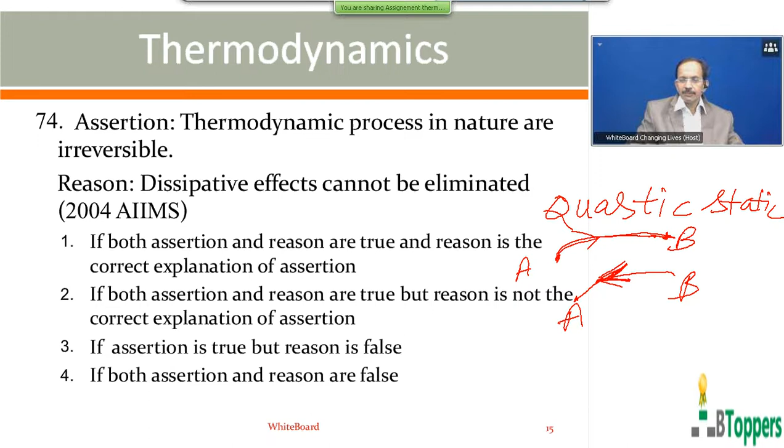Look at the next question, 75. It is also based on the same reasoning, again given in All India Institute of Medical Entrance, All India Institute of Medical Science exam 2005.

Assertion: Reversible systems are difficult to find in the real world. Reason: Most processes are dissipative in nature.

It is difficult to find a true reversible system in nature because there exists some friction and/or air resistance or other dissipative forces acting on the system in every process in nature. So here also the first option is the answer.

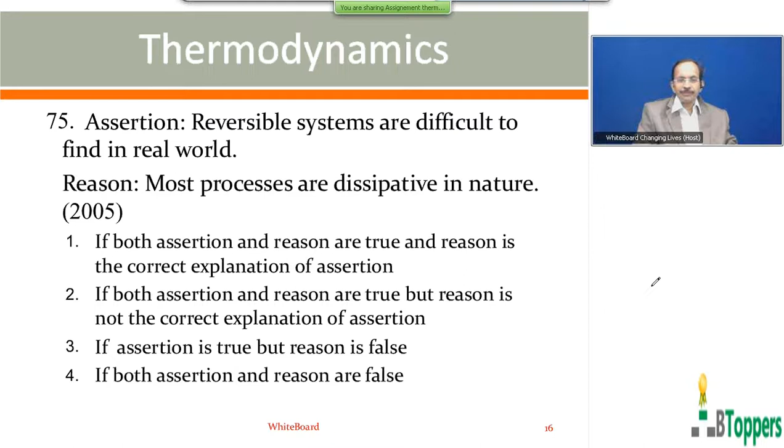Next, look at question number 76. This question was also given in one of the All India Institute of Medical Sciences exams in a previous exam paper. Assertion-reason, look at question number 76.

Assertion: The Carnot cycle is useful in understanding the performance of heat engines. Reason: The Carnot cycle provides a way of determining the maximum possible efficiency achievable with reservoirs of given temperatures. From Carnot's theorem, as I discussed about the statement of Carnot's theorem.

From Carnot's theorem, we can say that the maximum possible efficiency of a heat engine working between two temperatures T1 and T2 is given by E equal to 1 minus T2 by T1, where T2 is less than T1. T1 is called the temperature of the source, hot body, and T2 is the temperature of the cold body, called the temperature of the sink.

So for any heat engine working between the same two temperatures, the efficiency cannot be greater than the efficiency of a Carnot heat engine.

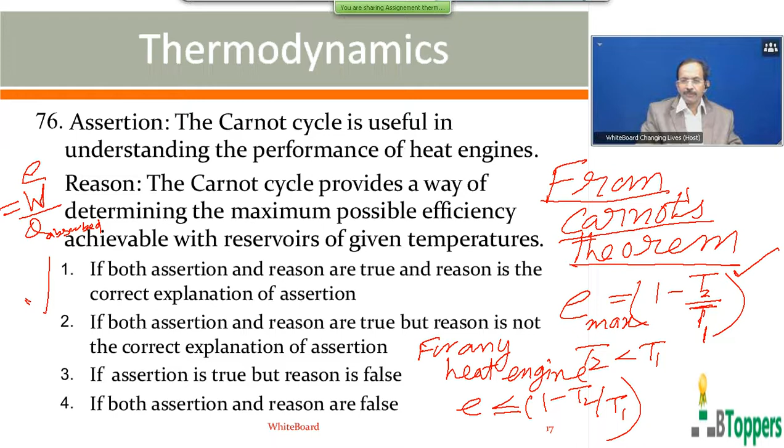So look at question number 77. This question was also given in one of the previous AIIMS exams, that is All India Institute of Medical Sciences entrance exam. Look at this question number 77.

Assertion: for an isothermal process in an ideal gas, the heat absorbed by the gas is entirely used in the work done by the gas. Reason: during a process taking place in a system, if the temperature remains constant, then the process is isothermal. As I discussed earlier, the theory part in isothermal process.

So for an ideal gas, in isothermal process, the temperature remains constant. The internal energy of a fixed mass of an ideal gas with a given atomicity is directly proportional to the absolute temperature of the gas. So if the temperature of the gas is constant, the internal energy of the gas will be constant, or we can say the change in the internal energy of the gas will be zero.

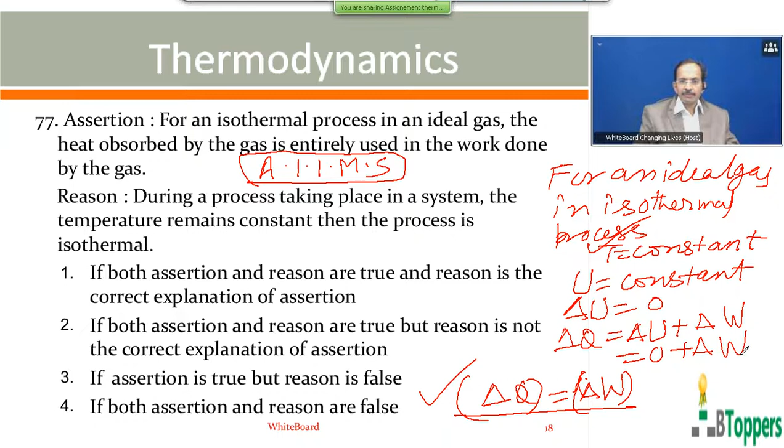So look at question number 78. Conversion of water to steam is accompanied by which process? There are 4 options on screen: adiabatic, isothermal, isochoric, cyclic.

You cannot call the conversion of water to steam an adiabatic process because heat energy is absorbed by the water. The heat energy absorbed, when water changes into steam, is equal to the mass of water converted into steam multiplied by the latent heat of steam, which is not equal to 0, which is greater than 0. Therefore, the process cannot be adiabatic.

And when water changes into steam, there will be a large increase in volume. During vaporization, there is a large increase in volume. So when water changes into steam or vapor, volume does not remain constant. Delta Q is not 0, and volume is not constant. Therefore, the process cannot be an isochoric process.

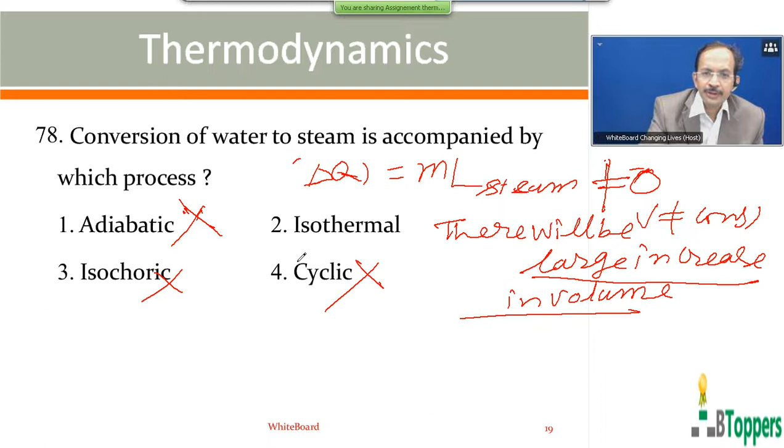So the conversion of water to steam takes place at a constant temperature equal to the boiling point of water. Suppose pure water is boiled in an open vessel at atmospheric pressure, then it boils at 100 degrees centigrade. Once water in an open vessel begins to boil at 100 degrees centigrade, the temperature of the boiling water remains constant at 100 degrees centigrade until the entire mass of water is completely converted into steam.

Therefore, temperature remains constant during the change of state. Therefore, the process can be called isothermal. So the second option will be the answer.

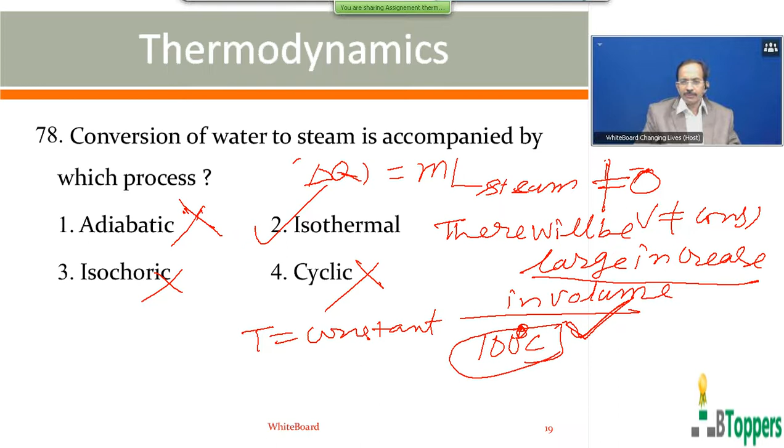Then next, look at question number 79. An ideal gas is taken through the cycle A to B, B to C, C to A, as shown in the figure. The net heat supplied to the gas in the cycle is 5 joules. The work done by the gas in the process A to B is - you can observe there are 4 options on the screen. So work done by the gas in a cyclic process is equal to total work done.

The net work done by the gas in a cyclic process is equal to the area below the PV graph and the volume axis - the total work done by the gas during the cycle. So in the process A to B, there is a decrease in the volume.

Volume decreases from 4 cubic meters to 2 cubic meters. So work is done on the gas in the process A to B because the volume at B is less than the volume at A. In the process B to C, volume is constant, so no work is done. In the process C to A, the volume of the gas is increasing.

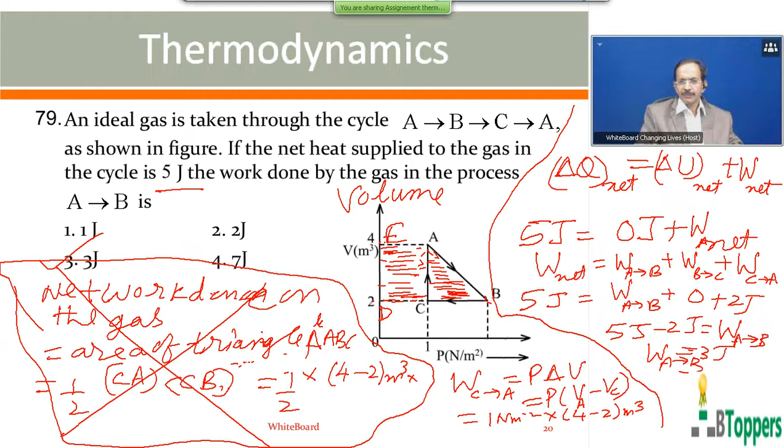Look at the next question, question number 80. A Carnot refrigerator extracts heat from water at 0 degree centigrade and rejects it to a room at 24.4 degree centigrade. The work required by the refrigerator for every 1 kg of water converted into ice is...

This problem is given on the Carnot refrigerator, which makes use of the Carnot cycle. So the lower temperature, the temperature of the body at lower temperature from where heat is extracted - the refrigerator extracts or removes heat from the colder place to the hotter place. Temperature of the colder place is 0 degree centigrade, or 273 plus 0 Kelvin. The temperature of the hotter place to which heat is pumped out is 24.4 degree centigrade, so 273 plus 24.4 Kelvin.

They are asked to calculate the work required to be done by the refrigerator to convert 1 kg of water into ice.

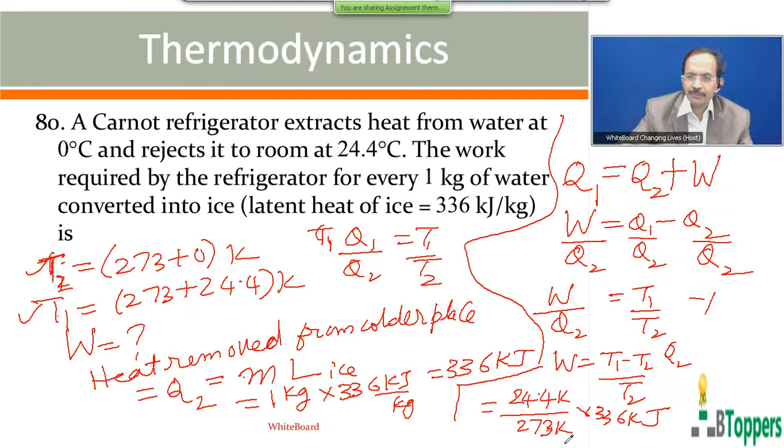So the closest answer for this is the first option. This was given in one of the previous EAMCET exam papers.

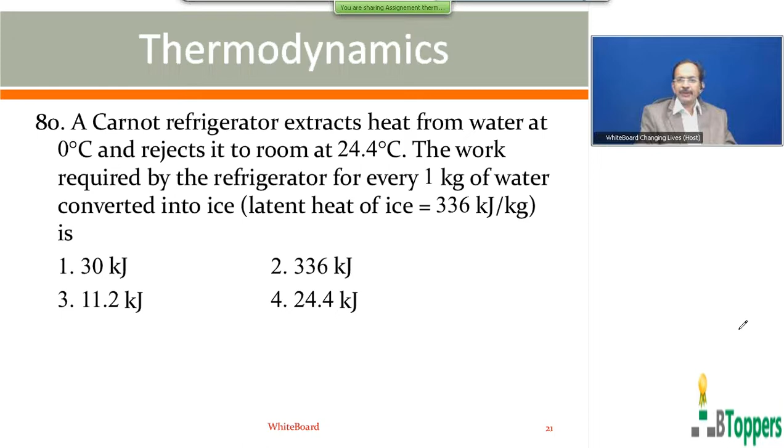So I am going to move to the next question. Look at question number 81.

A thermodynamic system is taken from initial state I with internal energy UI equal to 100 joules to the final state F along two different paths, IAF and IBF, as schematically shown in the figure. The work done by the system along the paths AF, IB and BF are WAF equal to 200 joules, WIB equal to 50 joules, and WBF equal to 100 joules, respectively. The heat supplied to the system along the paths IAF, IB and BF are QIAF, QIB and QBF, respectively. The internal energy of the system in state B is UB equal to 200 joules, and QIAF equal to 500 joules. The ratio QBF by QIB is...

So, of course, this problem was originally given in the 2014 IIT JEE exam. But the solution to the problem is within the scope of other entrance examinations also.

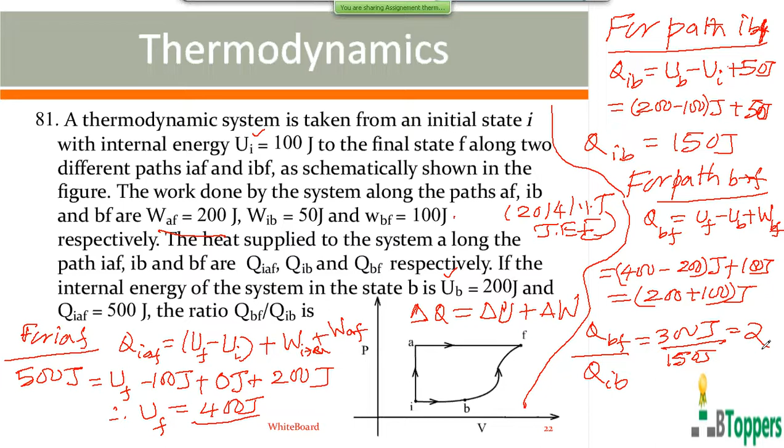Those who want to copy the working can take a pause and copy it. So if you divide QBF by QIB, QBF you get 300 joules, QIB has 150 joules, so the ratio will be 2. So the answer will be 2. Those who want to copy the working, please take a pause and copy it.

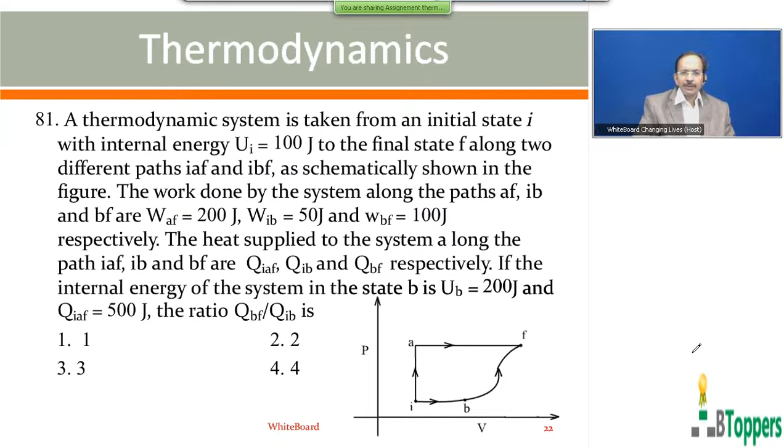So for question 81, let's discuss now. The second option is the answer; it's not, there are no options here, it's an integer question. Of course I have given the options there. So the second option will be the answer.

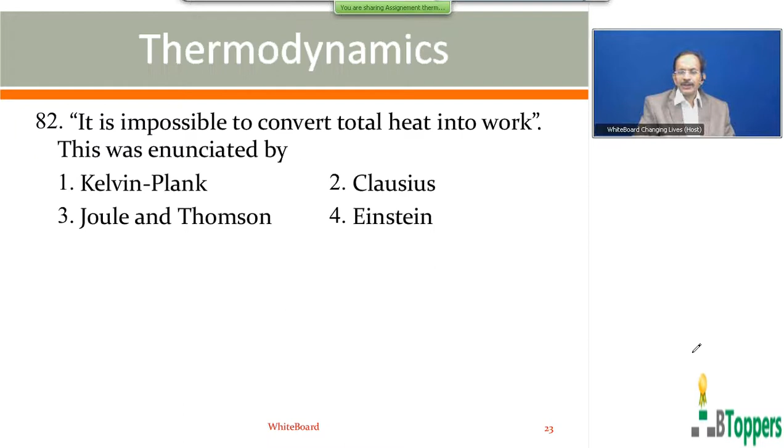Now look at question number 82. It is impossible to convert total heat into work - this was enunciated by. This is a direct question based on the statement of the second law of thermodynamics, which I already gave you: one is the Clausius statement, the other is the Kelvin-Planck statement. So this is a direct question, and the answer is already given to you.

Then look at question number 83. Heat cannot flow by itself from a cold body to a hot body without the aid of any external agency. This is also a direct question. It is impossible to transfer heat from a colder place to a hotter place without the expenditure of any work by the external agent. This is also another form of the second law of thermodynamics, which I discussed in the past.

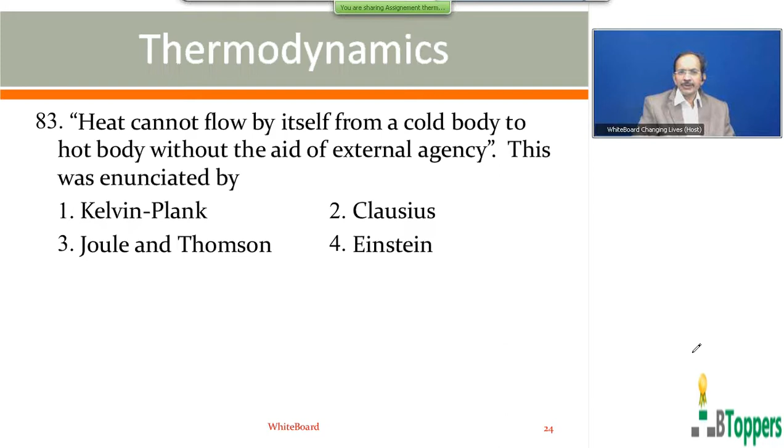See question number 84: which of the following statements refer to the second law of thermodynamics? There are 4 statements, I am going to read them out. Statement 1: perpetual motion of the first kind is possible. Statement 2: all the heat can be transferred from a low temperature region to a high temperature region. Statement 3: energy can neither be created nor destroyed - this third statement is implied by the first law of thermodynamics, not the second law.

Fourth statement: it is impossible to convert heat completely to mechanical energy. So the fourth statement refers to the second law of thermodynamics. From the second law, it is impossible to transfer the heat absorbed from a given place by the system and completely convert it into work without leaving any part of it anywhere. So the fourth option will be the answer.

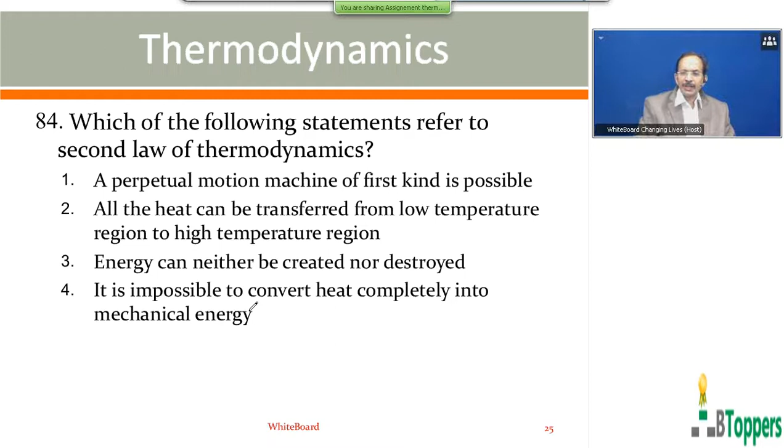It's also based on the statement of the second law of thermodynamics. As I discussed earlier, the two different statements for the second law are equivalent statements - you should not call them different statements, one statement is equivalent to the other. So from the second law of thermodynamics, we can say that it is impossible to construct a device which, operating in a cyclic process, can completely convert heat into work.

As I discussed in the introduction for the second law of thermodynamics, a given amount of work or mechanical energy can be completely converted into heat. A simple example is a fast moving bullet suddenly stopped - all the kinetic energy or mechanical energy lost gets converted into heat. So it is possible to convert a given amount of mechanical energy into heat, but the converse is not possible. From the second law of thermodynamics, you can say that it is impossible to construct a device which, operating in a cyclic process, converts a given amount of heat completely into work.

So the second, that means this is not possible. It's not possible to convert a given amount of heat completely into work. That means there is basically some asymmetry in nature.

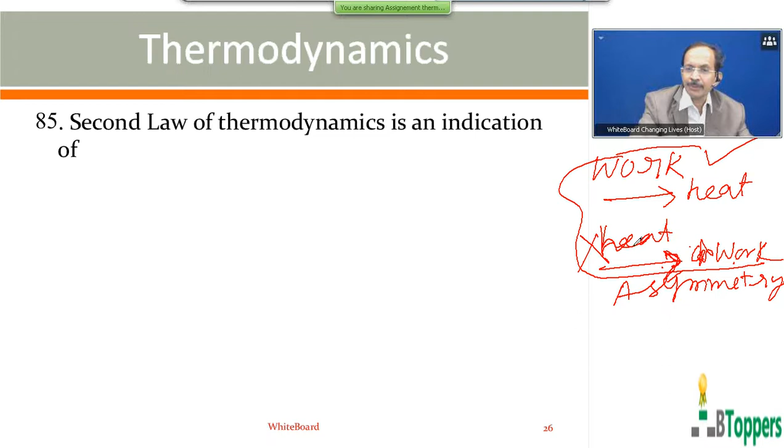That means there is some asymmetry in nature. Complete conversion of work into heat is possible, but complete conversion of heat into work is not possible. So this second law of thermodynamics indicates this asymmetry in nature. So if you see question number 85, second law of thermodynamics is an indication of the first option, asymmetry in nature. So the first option is the answer for this question.

Let us see the other options. Symmetry in nature, this cannot be. Heat energy can be completely converted into work - that's wrong, according to second law of thermodynamics.

The first law of thermodynamics is a consequence of conservation of energy. The second law of thermodynamics does not directly indicate law of conservation of energy. That means second law of thermodynamics indicates that processes which do not violate conservation of energy may still not be possible. There are some processes which do not violate the law of conservation of energy but still are not possible to take place in nature. So the limitations of first law of thermodynamics are indicated in the second law of thermodynamics. So first option is the answer.

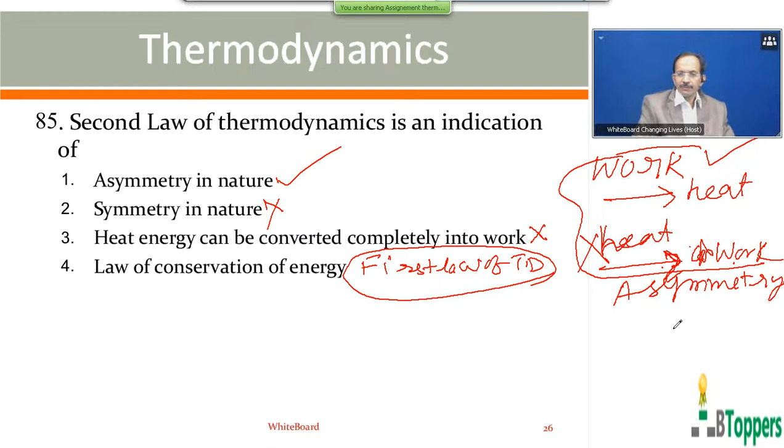Look at the next question, number 86. Also consider the following statements A and B and identify the correct answer given below.

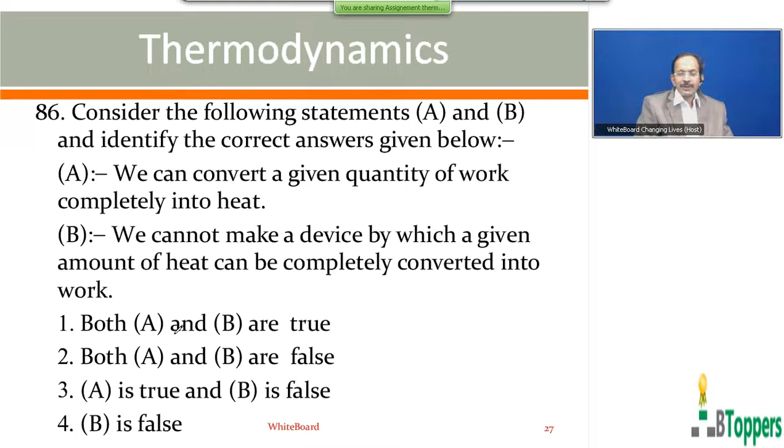Statement A: we can convert a given quantity of work completely into heat. Statement B: we cannot make a device by which a given amount of heat can be completely converted into work, which I just discussed now. It is possible to convert a given amount of mechanical work into heat, but conversely it's not possible to convert a given amount of heat completely into work. That means both statements A and B are true. So among the four options shown on the screen, the first option is the answer.

Look at question number 87. Consider statements A and B and identify the correct answer. Statement A: first law of thermodynamics specifies the conditions under which a body can use its heat energy to produce work. Statement B: second law of thermodynamics states that heat always flows from a hot body to a cold body by itself.

So here, statement A is not correct because it's the second law of thermodynamics which specifies the conditions under which a body can use heat energy to do work. That means it's not possible to completely convert heat into work - that is indicated by the second law of thermodynamics, not by the first law of thermodynamics.

Of course, one of the statements of the second law of thermodynamics says that heat cannot spontaneously flow from a cold body to a hot body without expenditure of mechanical work. That means spontaneous flow of heat takes place from hot body to cold body, so statement B is correct and statement A is wrong. This question was originally given in the 2005 EAMCET medical entrance exam. So A is false, B is true, the fourth option is the answer.

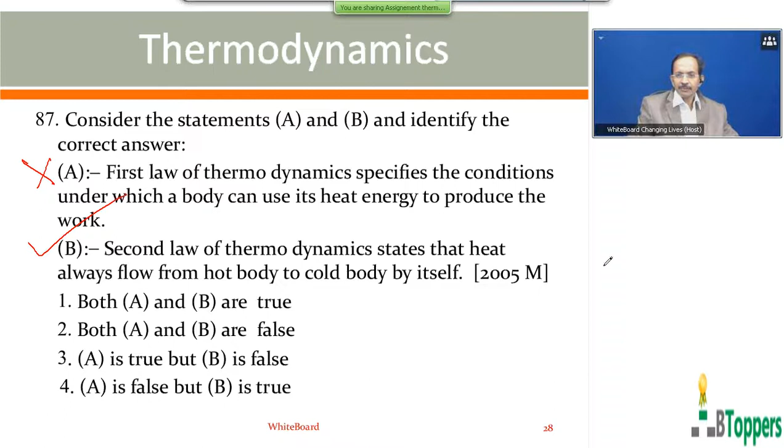So look at question number 88. The door of a running refrigerator inside a room is left open. The correct statement out of the following ones is - you can read out the statements which I already showed in this question earlier.

So as I discussed about the refrigerator, an actual refrigerator and Carnot's refrigerator, basically the refrigerator transfers heat from a colder place or colder region to a hotter place. That means the refrigerator transfers heat from the interior of the refrigerator, from the refrigerant, to the surrounding room, and this is done at the expense of energy supplied by the electric motor. So if the door of the refrigerator is left open, the process becomes faster.

When the door of the refrigerator is kept open, some heat energy will flow from the front, from the room into the interior of the refrigerator. By natural convection and conduction, there will be transfer of heat energy from the room into the refrigerator when the door is kept open from the front.

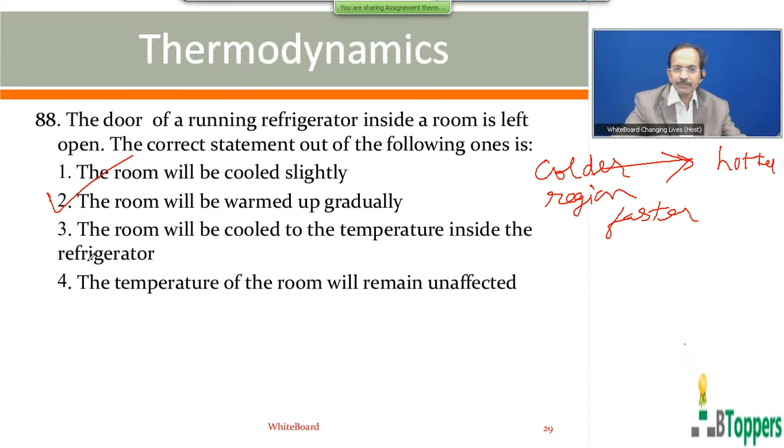So look at question number 89. This question you find in the board intermediate textbook, academic book, I observed. I think originally it was given in one of the previous All India exams. 5 moles of

an ideal gas, when heated through 20 Kelvin, expands by an amount of 8.3 into 10 power minus 3 cubic meter under a constant pressure of 10 to the power of 5 Newton per meter square. If CV equals 20 joule per mole per Kelvin, find Cp.

You are given the number of moles of the gas, increase in temperature, increase in the volume, and pressure of the gas, and given that pressure is constant. To find Cp, you have to find the molar gas constant, because we know the difference between the molar specific heat at constant pressure and molar specific heat at constant volume is equal to the molar gas constant.

So at constant pressure, from the perfect gas equation, you can write P delta V equal to nu R delta T, where nu is the number of moles of the gas. So therefore, the molar gas constant can be written as P delta V by nu into delta T.

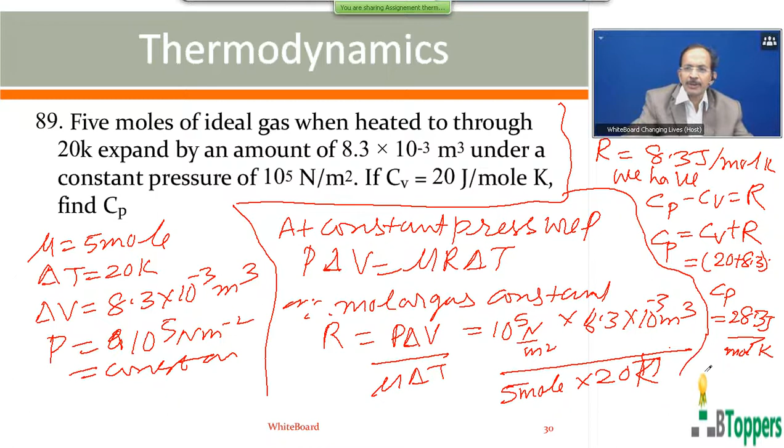So if you want to copy the solution of the problem, take a pause and copy the solution. Now look at question number 90.

As I explained in a similar question earlier, the work done by the refrigerator to remove an amount of heat Q2 from a colder place at temperature T2, which in this case is 273 plus 0 Kelvin, to the hotter place, the room at temperature T1, that is 273 plus 20 Kelvin, is given by Q2 into T1 by T2 minus 1.

So you can write the work done by the refrigerator as power into time, power of the motor used for the refrigerator into time. Quantity of heat removed is equal to the mass of water freezed into latent heat of fusion of ice. Q2 can be M into Li, where M is the mass of water freezed, and that equals power into time into T1 minus T2 by T2.